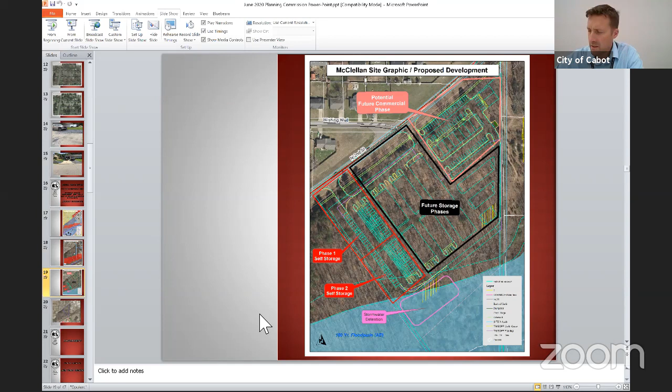All right, it is approved. We'll go ahead and adjourn the Board of Adjustment meeting, and we'll get into our Planning Commission meeting here. 7:44. Go ahead and open our public hearing, and the next one here.

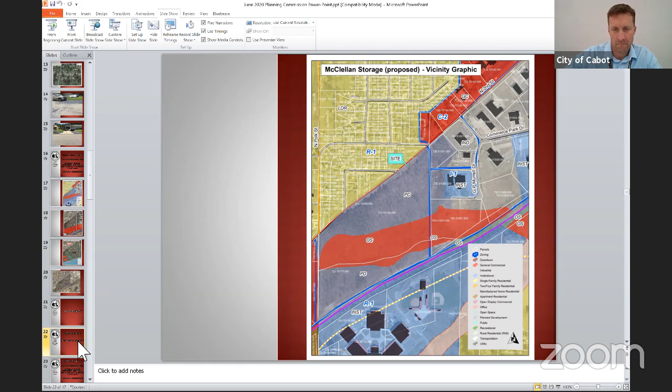Maybe Kim, if you want to read out the first item: rezone from R1 to C2 special use for McClellan storage development, Highway 367.

All right, Kevin, what highlights do we need to hit now here in Planning Commission? Well, it's the same report, so it's a concurrent report. If you go back to the final page, it essentially says considerations for the commission: simply that the action regarding the special use permit is contingent upon city council approval of the zoning map amendment request, which is something you all are accustomed to.

But right now you have a planned development land use. It is not contrary to the request. I will make a point to reference 473 for standards under the special use permit. In carrying out the purpose of the section, the commissioner's considerations shall include, but not be limited to, the following development standards and design specifics.

So while it's not site plan review, you are tasked with looking at the appropriateness of these standards and determining, in the discretion of the Planning Commission, for each specific special permit use location. There's a list of A through D. I'm not sure if you'd like me to recite them for you, but it gets into public health, safety, and welfare.

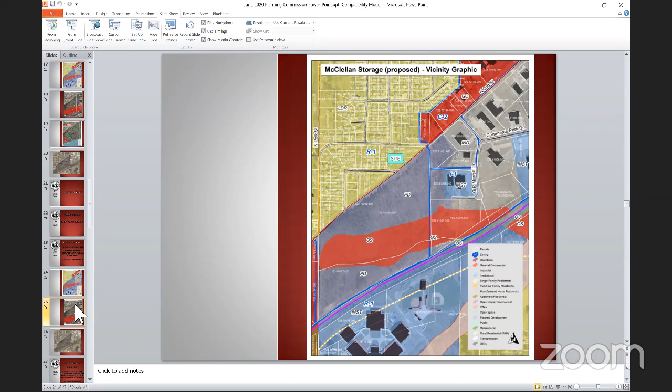The proposed land use is compatible and will not adversely affect other properties in the area where it's proposed to be located. And the proposed use is within the provisions of the special permit uses set out in the use chart, and that the proposed use conforms to all applicable provisions of the code zoning district in which it is to be located.

And the use facilitates public convenience at that location. These are all very broad general guidelines, but for the record, they should be known.

So now we're looking at rezoning from R1 to C2 within that special use that we just approved in the Board of Adjustment. Correct. In terms of what comes first, technically the zoning has to be enacted first, and then you're allowed to have a special permit use for either the entirety of the 12.25 acres or a portion of it.

All right, Commissioners, do you guys have any questions? None. If not, I'd recommend a motion to approve.

I'll make the motion. Is that Prater? Yes. You have a second? Second. Second from Bird. Roll call vote, please. Bird, yes. Carlisle, yes. Prater, yes. Mowdy. All right, that rezone is approved.

Next item, Kim. Rezone from R1 to R4H, part of block 36, town of Cabot, and part of the southeast quarter of section 13, T-4-N, R-10-W, South Second Street, Bond Engineering.

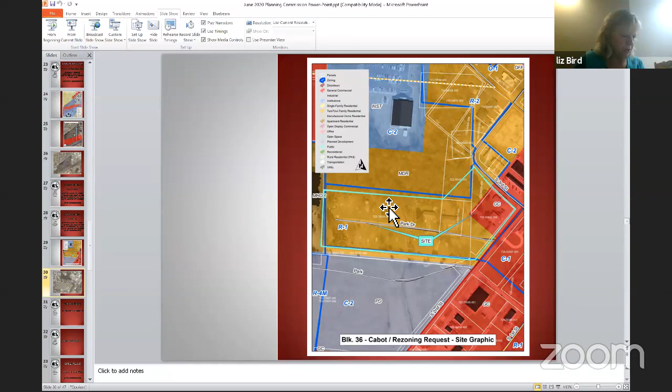I have a question. Are you taking into consideration the triangle that Kevin commented on earlier that's marked off of that residence that would need to be zoned C2? And Kevin, I can't recall, would the residence there not be zoned C2, just the triangle? And would that make a difference in downsizing the R4H area?

I think we might be speaking of two different, quote, triangles. I think exactly. Okay, I think that cursor - it's a very modest mapping issue relative to parcels. I think you might be referring to a larger area of concern. This was really a very small area that was notched out. You can see the cursor.

Yes, that's right. I'm not sure what the count is, or perhaps Mr. Robinson can explain why the survey pins are shown where they are, but we technically show it as still being zoned R1. It's just a portion of it that was not included in the survey boundary.

That's all. Okay, Aaron, is that in the next line item, the one going R1 to C2? Yeah, we can talk about it now, or we can talk about it when we get to that point. Let's go ahead and knock it out now, and we can vote on both of them.

Okay, so the little triangle part, I haven't actually done research as to who owns that little triangle. It should be with this property, but whenever you look at the warranty deeds and you look at everything, that little notched triangle piece that's next to North 2nd Street is not being deeded with this property. So the legal description that I wrote was basically the legal description that went with the deed. We're going to have to do a little bit of research and try to figure out who actually owns that little triangle piece.

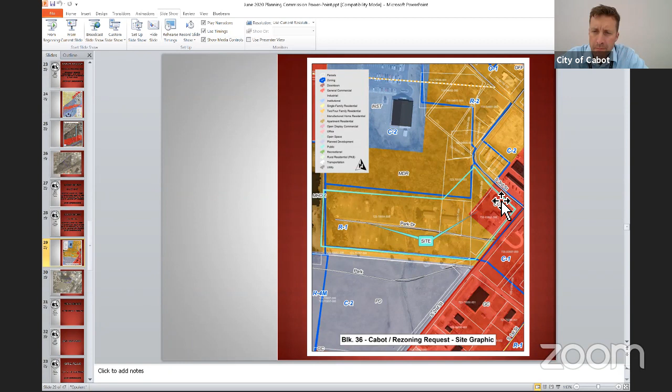Right, and so I'm assuming that goes around the old VFW building. I don't know how to come up with a legal description based off of the map. I can guess, but I don't know how to get that boundary exactly.

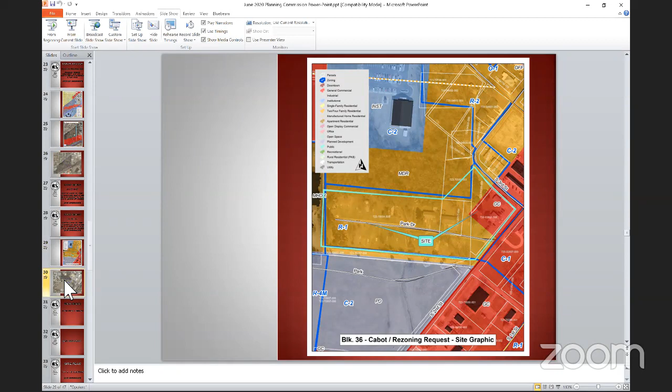Well, I just wanted to bring it up for the record. We may, for an official request, need to reduce the amount of acreage you're requesting to C2, because it does appear that a portion of your request area is already zoned C2. We just want to make sure we're consistent with the acreage you're asking for and what the council will rezone. I can get with Laura tomorrow to see if we can pull something together that will take out that little corner already shown as C2.

I can make a point to look at some of the other versions of our zoning map to see if anything has changed over time, but this is the most official one that I know to use. So we'd be happy to help you out, but I just thought I'd mention that for the record.

Okay, Aaron, is there anything else you want to add to that front portion? No, sir. All right, commissioners, I'd recommend a motion to approve if you guys don't have any other questions.

I'll make a motion to approve. All right, do I have a second? Second. Bird, roll call please. Bird, yes. Carlisle, yes. Prater, yes. Mowdy, yes. All right, the rezone is approved.

All right, we'll go ahead and close our public hearing at 8:05 and then roll into new business. And on your agenda, we're going to flip-flop these two. We have item A, site plan, item B, preliminary plat. We're going to tackle the preliminary plat first. Preliminary plat, lot 1, J.A. Division, Bond Engineer.

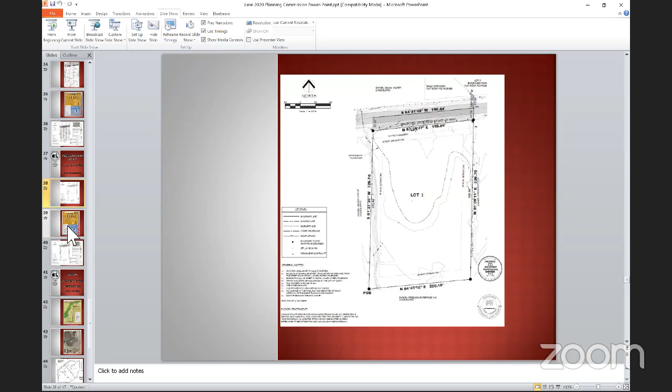There are a number of lots of this size along this stretch of Bluebird, as you can see in the graphic, many of which have already undergone redevelopment. And the dominant type of development happening here is your duplex, triplex type medium density residential, which is what the land use calls for, as well as the zoning.

So the land use and the zoning and the platting are all consistent. And this is simply just to formalize the site and its boundaries relative to the eventual submittal for site plan approval, which you will also be hearing this evening.

There were a few items that staff had gone over with the applicant. There are a number of items, according to your report, that were not addressed. Those are shown in red highlight in the back of that staff report. Looks to me like that is page 5. There were several planning comments, comments 1, 2, and then forwarding to comments 12 and 13. And there was a comment that was outstanding from the water department.

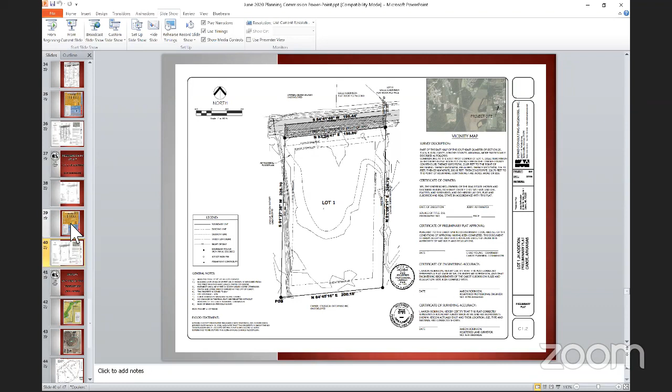If you'd like me to go over those for the record, I'd be happy to, or if the commission has any questions regarding those items shown in red as not addressed, myself and/or Laura would be happy to assist. I think we could make approval based on the comments from staff as an amendment to that. Any questions from commissioners?

If not, I need a motion to approve the preliminary plat with incorporating the comments from staff. Prater makes a motion. Motion from Prater. Do I have a second? Second from Carlisle. Roll call please. Bird, yes. Carlisle, yes. Prater, yes. Mowdy, yes. All right, that preliminary plat is approved.

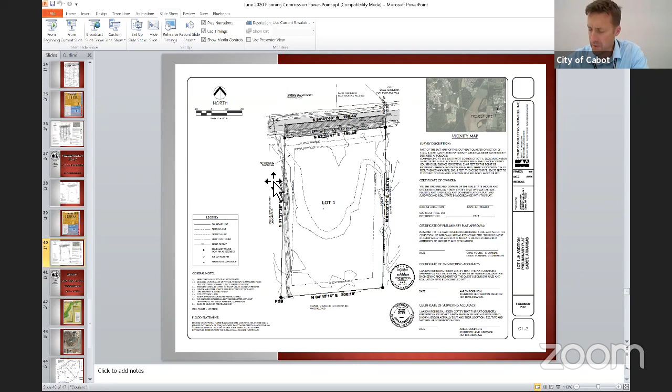Now we'll go back to the site plan. Site plan, lot 1, J.H. Addition, Bond Engineering.

Okay, so this is the same site, just a different level of review. This is for the site plan review. It will have the existing parcel of record. They are proposing 3 duplexes and 3 triplexes. This would be 15 total units.

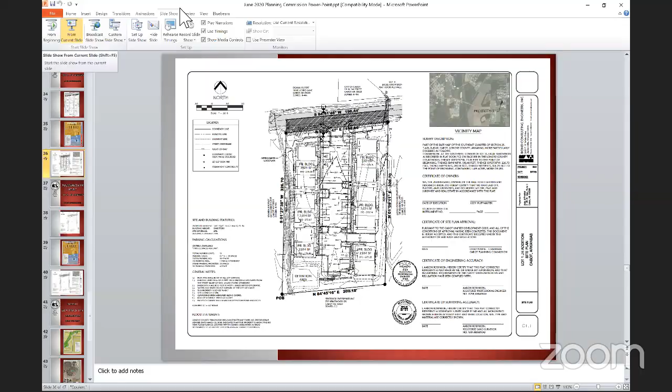The zoning is already in place and the land use has already been adopted, and so everything from that standpoint is consistent with city regulations. There are a few outstanding comments similar to the platting exercise, but there are fewer outstanding items from the staff report. I could go over those if you would like.

There's comment number 3 regarding half-street improvements, and then there's a small comment about labeling the right-of-way dedication. And then there's an outstanding comment from the fire marshal, and there's one outstanding comment from the water department.

I will note that the half-street improvement along Redbird is required. I know that the applicant, there was some discussion about them wanting to waive the half-street. My understanding, and Ms. Nobles can qualify this, is that you cannot waive half-street improvements. Correct.

Unless commissioners have any questions, I'd recommend a motion to approve based on the comments from staff.

What were the comments from the fire department? Was everything okay there? The fire department showed that they needed to add the location for the existing hydrant and dimension it from the existing hydrant to the property line. Their plans showed a proposed hydrant, but they didn't actually line it up with the existing water supply. The water comment was very similar, reflecting existing and proposed hydrants.

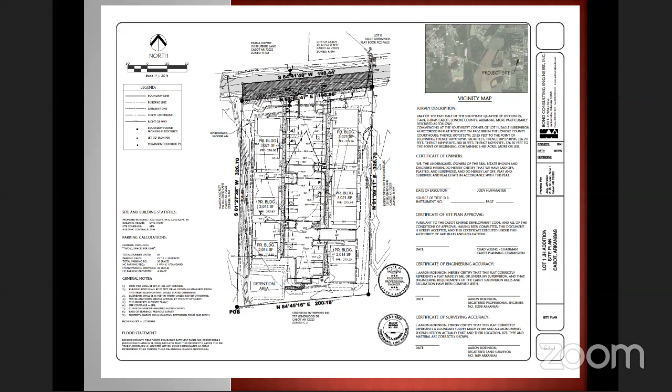They should be set further back, and the fence enclosure should enclose the dumpster but not the sidewalk. That's correct, and that's our intent. All right, for all the others, the dumpster sits behind the sidewalk and the fence is behind the sidewalk too, so the sidewalk stays clear for any pedestrians.

All right, any other questions or comments from the commissioners? Seeing none, I'd entertain a motion to approve. I'll make a motion to approve. A motion to approve from Mowdy. Do I have a second? Second from Carlisle. Roll call, please.

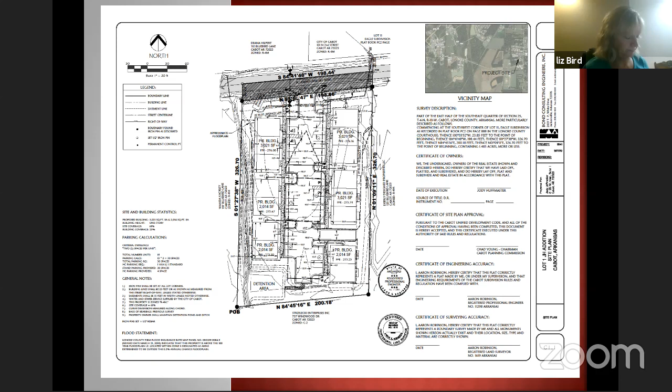Bird, yes. Carlisle, yes. Prater, yes. Yes. All right, site plan is approved. I'm assuming that's contingent on the bond fulfilling all the comments from staff. Correct, as well as the dumpster. It's okay to amend your approval with that caveat, correct? Yes.

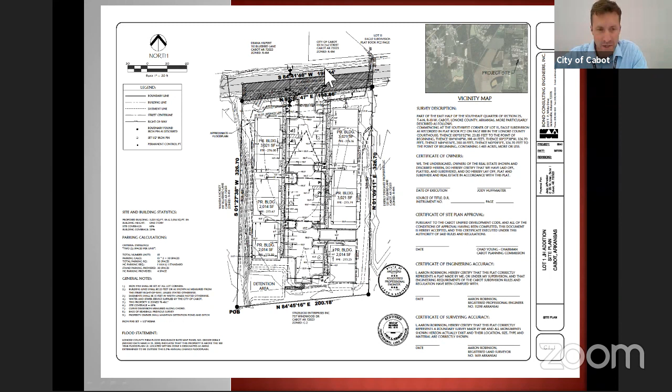All right, guys, let's go to the next item on the agenda, replat lots 71R and 72R, Cobblestone, Bill O'Brien.

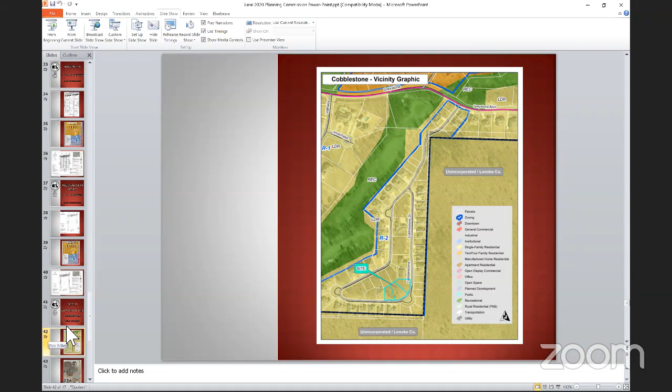Kevin? Yes sir. So we have, yes sir, your report is cobblestone lots. The existing lots are lots 70, 71, and 72. The applicant is proposing to essentially do a lot combination, turning 3 existing lots into 2. These would be the proposed lots as shown. The combined acreage for all 3 properties is just over half an acre.

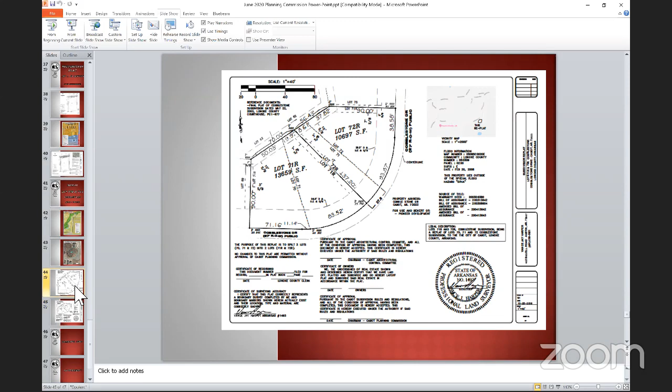Their request is lot consolidation from 3 to 2 lots, proposed 71R at 0.31 acres and lot 72R at 0.24 acres. This subdivision is the one we had looked at previously, where years ago when it was approved, there was an ordinance allowing administrative review and approval of setbacks that aren't necessarily the same as what we'd find in the R2 zone. We're dealing with the 7-foot versus the 3-foot, if you recall that, Commissioner Chair, and this is that type of development.

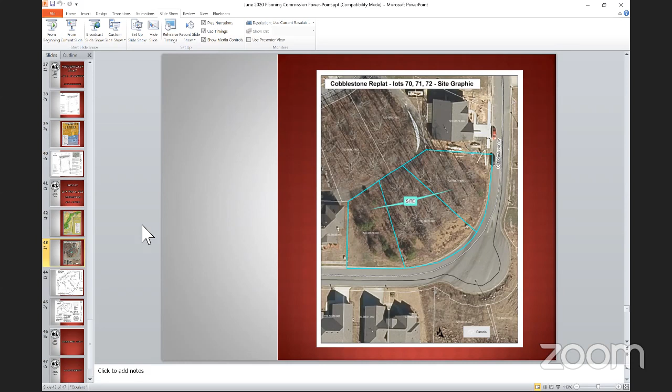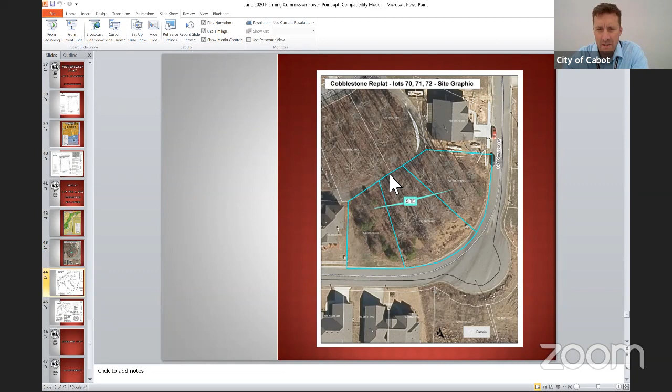It could just be that the property owners or builder wants to sell these with slightly larger lots, which is perfectly fine, but that's essentially what's being asked for here. Staff didn't have any outstanding comments; land use and zoning are obviously in place. I think you realize too, trying to set a house on each of those 3 lots would be pretty tricky. So it looks like this makes a lot of sense from a size standpoint.

Bill, if you've been out there, it kind of slopes upward on that corner. I think in your report there's actually a Google Street View, but it doesn't do it justice until you go out there. So, sure, applicant, do you have any comments?

All right, seeing none, commissioners, do you have any questions? If not, I'd entertain a motion to approve. I think all he's trying to do is just even up those 2 lots, correct? That's correct. Yeah, I make the motion for approval.

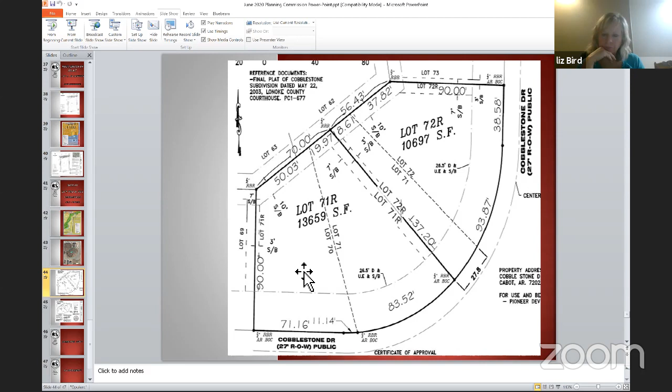I got a motion from Prater to approve. Do I have a second? Second from Bird. Roll call vote, please. Bird, yes. Marlowe, yes. Frank, yeah. Mounty, yes. All right, that replat is approved.

All right, this comes down to my favorite slide, community input. Does anybody have any input that you guys would like to share? Anybody online, anything Roger? A handful of watchers, but no questions posted.